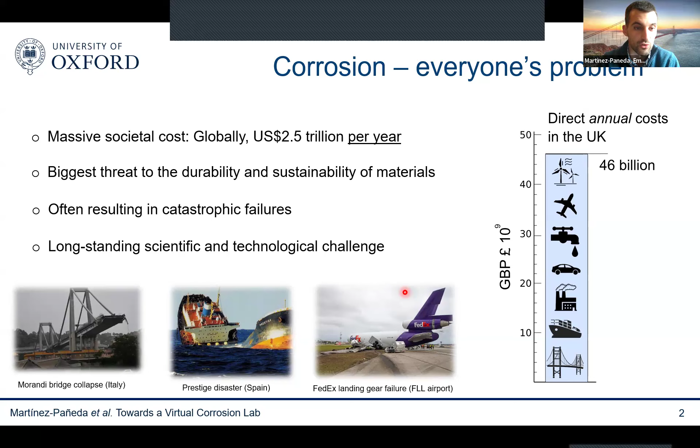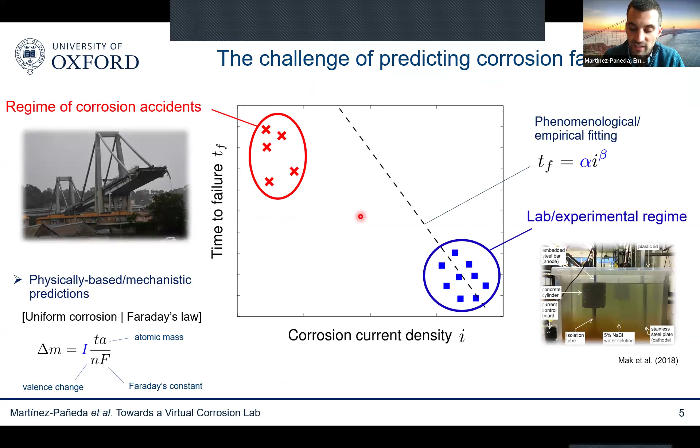So this is one of the elements of the picture, but there's 2 elements basically that give us an opportunity for us computational mechanicians to develop models that are finally capable of predicting corrosion. So the first takeaway I want to say is that predicting corrosion failures requires explicitly resolving the underlying physical processes. That is the problem.

If we want to go from here to here, we need to embed the physics into our model. We cannot make any assumptions. We need to remove all these kinds of fitting parameters. We need to minimize assumptions. We need to just deliver predictions like these that rely purely on physical parameters that have a clear physical meaning and that we can independently measure in a lab. So I believe there's an opportunity now to achieve this.

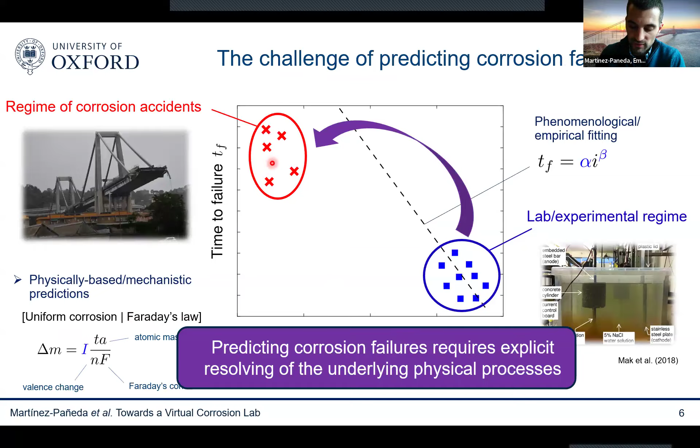And this opportunity has been made possible for 2 reasons. The first one is that we finally have very powerful computational multiphysics tools. Because, as I said, why don't we have computer models for corrosion? Well, one reason is that we do experiments in a very different regime than in practice. But the other aspect is that this is a very complicated coupled electrochemomechanical problem.

You can see here a standard sketch showing a standard stress corrosion cracking problem where you have basically a metal that is subjected to mechanical straining. That metal has a defect, could be a crack, a pit. That metal is exposed to an aqueous electrolyte, imagine seawater. In that aqueous electrolyte, you have multiple ionic species that are moving around due to fluid flow, due to electromigration, due to diffusion.

Then at the interface between the metal and the seawater, you have multiple chemical reactions happening. You have, for example, corrosion, so you have metal atoms detaching. You also have other chemical reactions that induce the absorption of dangerous species such as hydrogen. Then those hydrogen atoms will travel inside of the metal. It will attract to areas of high hydrostatic stress. They will lead to damage, and then you'll get fracture of the component, and so on and so forth.

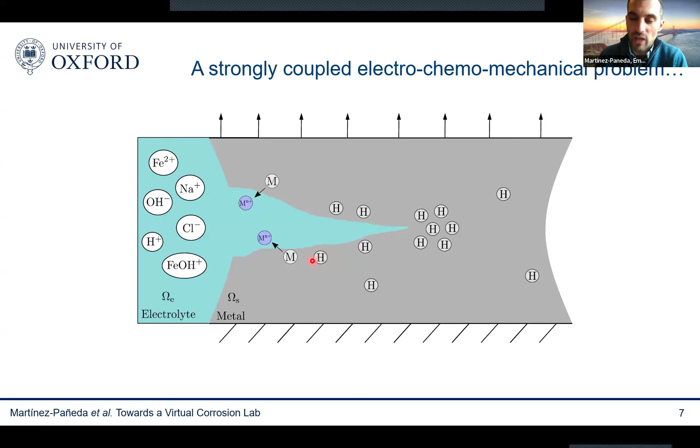So there's many things happening here, many electrochemomechanical phenomena. All of them are important, and all of them are strongly coupled. So if you really want to capture the physics of the problem, the mesoscale physics of the problem, you need to capture all this phenomena. And the good news is that we know what are the PDEs that describe each of these physical phenomena.

So there's no calibration with experiments. Before I run a simulation for a given material, I know what those numbers must be.

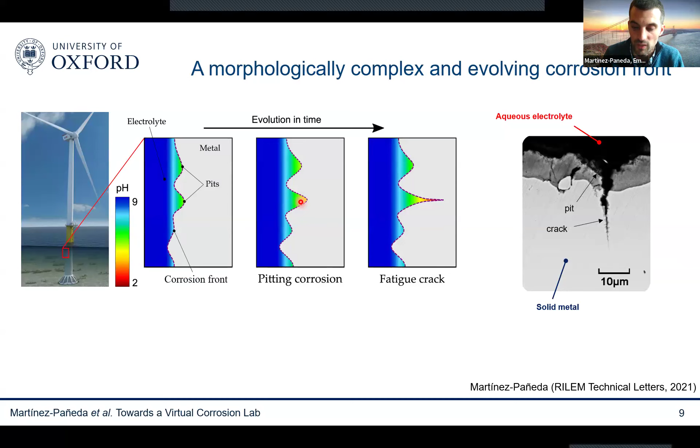So I need to be able to do all of this while this interface is evolving. And this is, I think, one of the main reasons why this has been a big obstacle for us computational mechanicians. People have tried with level sets and other techniques, and we have been able to get somewhere, but not as far as we needed. Let me show you a little bit of the complexity of the problem.

So my whole presentation is going to be a bit high level, but I'll say a few mathematical details as well. And of course, feel free to ask me after my talk.

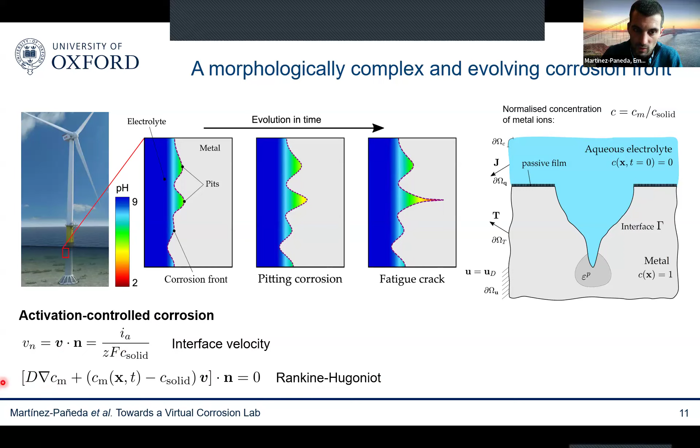But if I have diffusion control corrosion, if I saturate the number of ions at the interface and we need to wait for those ions to move away within the electrolyte, then the velocity of the pit is given by substituting the saturated concentration, the Rankine-Hugoniot condition, and the concentration of metal ions at the interface is given by the Dirichlet boundary condition.

What I want to say here is that this is a very complicated mathematical and computational problem, because we have an evolving interface that we need to keep track of, with a complex morphology, and changing boundary conditions—Dirichlet, Robin—that change in time and space. This is a really complicated nightmare. I'm used to dealing with other interfacial problems such as fracture mechanics, but nothing surpasses this. This is really a computational nightmare.

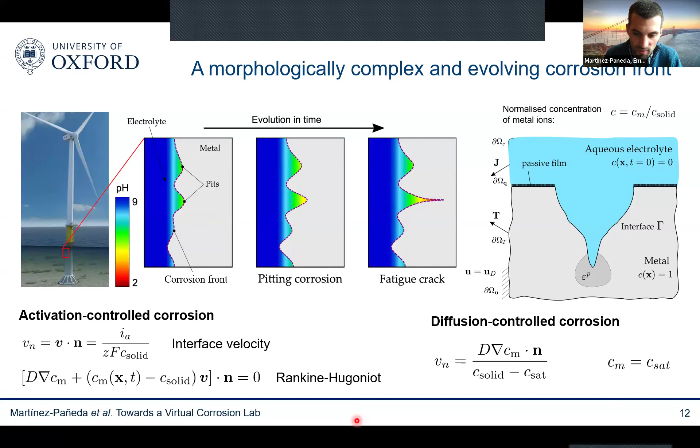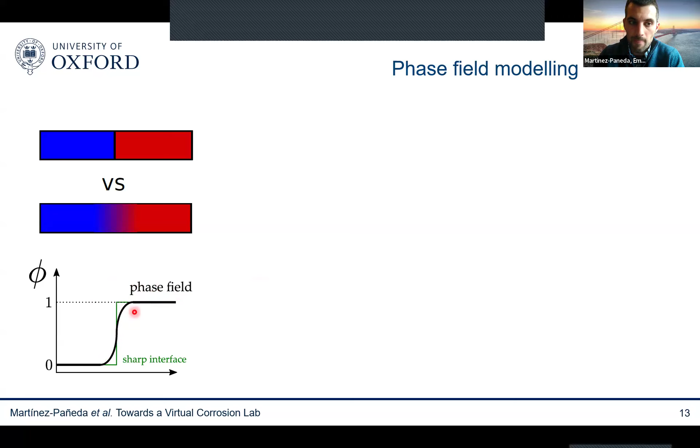And I think this is where phase field models give us an opportunity to tackle this. Phase field models are very compelling when dealing with interfaces. Hopefully most of you have heard about them before, but if not, the idea is quite simple. Whenever you have an interface, you can describe it between two phases as sharp and discontinuous, or as phase field methods do, you can smear that interface over a finite domain and use an auxiliary variable, the phase field, to describe where your interface lies.

This implicit representation of interfaces has many computational advantages, because then you just need to define a differential equation for the evolution of the phase field. And in essence, you can capture any interfacial computational problem, no matter how complex.

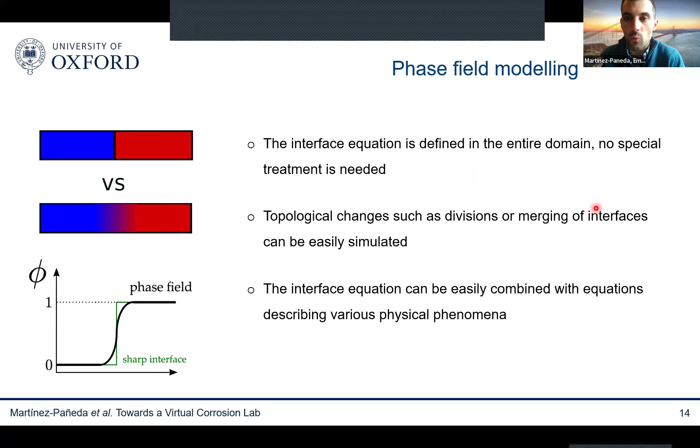Some advantages that come as a result of this: you define the interfacial equation in the entire domain, so there's no need for any special treatment, no need for moving boundary conditions, because topological changes such as division or merging of interfaces are naturally captured without any ad hoc criteria. Also important here, you can very easily couple this interface equation with equations describing all the physical phenomena, so it's very well suited for multiphysics problems.

As I said before, phase field has been a revolution in many areas of science and engineering. It is by far the most widely used technique in solidification and microstructural evolution—this is where it all started. It has also become extremely popular in fracture mechanics.

Our point is that the same way phase field has revolutionized these two fields, there's an opportunity for us computational mechanicians to achieve a similar revolution in the area of corrosion. As you will see later, this is an emerging field—it started only a few years ago, but it's growing quite rapidly, and I think this is the time to ride the wave. So basically, what I want to present today is an opportunity. I'll show you that it's very easy to jump into this wave, and that this is a very good moment to tackle this important problem with these techniques.

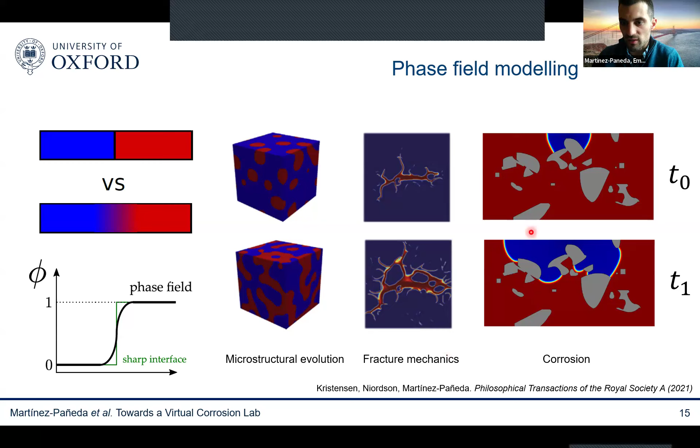So how does it work? Again, I'm not going to get too much into the details. I summarize a little bit the state of the art in this recent review paper.

The idea is that, similar to other interfacial problems, the phase field is going to describe the evolution of the corrosion front, so material dissolution. It's equal to 0 in the aqueous electrolyte, equal to 1 in the metal, and varies smoothly in between. So now we have that concentration and that phase field variable.

This is the simplest corrosion model that I can think of. There are other elements, mechanics plays a role for example, but I'll discuss those later on. I'm not going to get into the details of how you derive this, but if someone is interested, everything is based on a free energy functional, so everything is based on thermodynamics, similar to other phase field models.

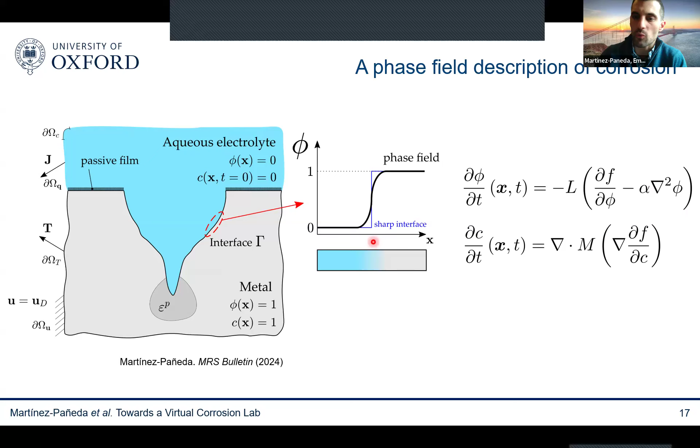It's more similar to those using microstructural evolution than those using fracture mechanics, but again, similar to those phase field fracture models. Basically, in the simplest version, you have a system like this: an Allen-Cahn type of equation, and a Cahn-Hilliard type of equation without the gradient term. So an equation for the evolution of the phase field, and an equation for the evolution of the concentration of metal ions, in the simplest form.

Then you can make some constitutive choices. Most phase field corrosion models are based on the so-called KKS model, so you assume thermodynamic equilibrium between the solid and liquid phases. But basically what I want to say here is that you end up with two equations like this.

An equation for the short-range interactions, the phase field equation, which is basically simulating material dissolution, the detachment of metal atoms. And then another equation for the long-range interaction, which is the transport of metal ions. You can see that these two equations depend mostly on two parameters.

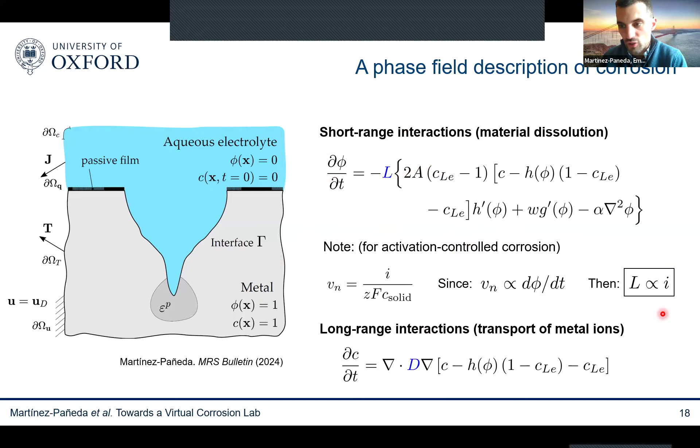So the mobility coefficient L and the diffusion coefficient D, and both have a clear physical meaning. D is a diffusion coefficient we can measure very easily in experiments, and L, this mobility coefficient, for a case of activation-controlled corrosion, is proportional to the corrosion current density. So you can run a very simple experiment in 1D under activation-controlled corrosion, and then correlate that mobility coefficient with your corrosion current density.

Let me show you how this works. I'm going to start with a very simple example, the simplest I can think of. This is a classic benchmark in the corrosion community, called the pencil electrode test, and it's very simple because you effectively have 1D corrosion. You have a metallic bar that is corroding basically in one direction, so it's effectively 1D.

You can see how it works here. On the left, you're seeing the evolution of the phase field, the evolution of the corrosion front, how the metallic bar is corroding. On the right, you see the concentration of metal ions, all the way from the saturation concentration to 0 far away in the electrolyte.

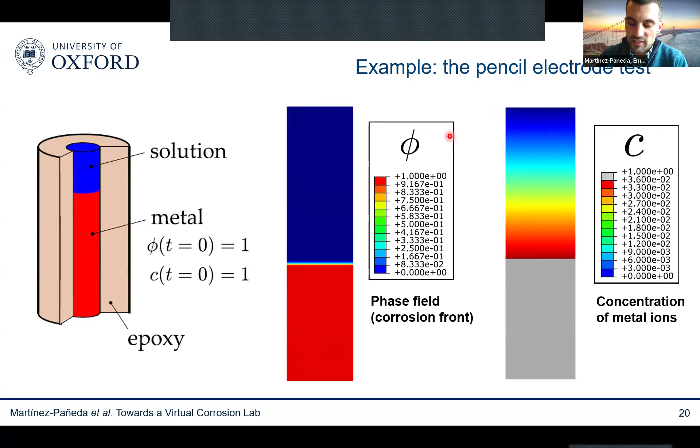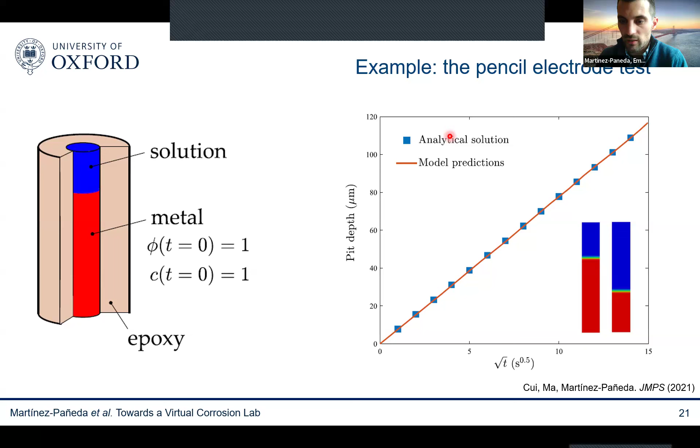Because this is a simple 1D problem, we have an analytical solution for the case of diffusion-controlled corrosion, so we can compare the outputs of the model with that analytical solution, and as you can see, it agrees very well. We have also compared with experiments, and it agrees quite well.

One aspect I want to emphasize is that these models can capture naturally and very nicely the transition from activation-controlled corrosion versus diffusion-controlled corrosion that I discussed before. You can see this here: as I ramp up this mobility coefficient, increasing my corrosion current density, I go from the linear behavior of activation control corrosion to the parabolic behavior of diffusion control corrosion.

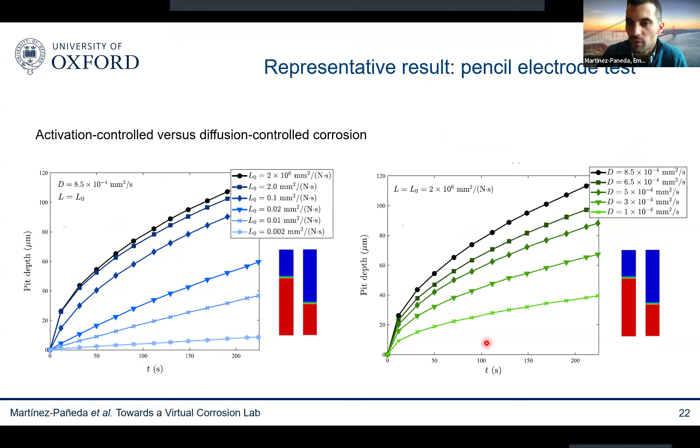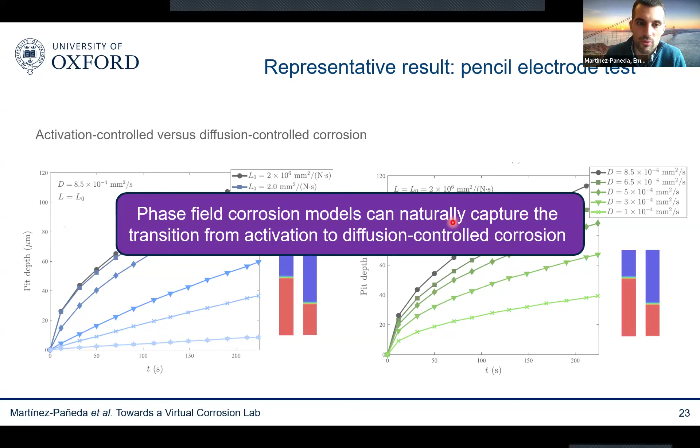This means that when I'm in the regime where the corrosion current density is high enough, my predictions are going to be quite sensitive to the diffusion coefficient. So this is another takeaway: even though I mentioned before we have very complicated boundary conditions changing in time and space, we don't need to worry about those. These phase field corrosion models can naturally capture the transition from activation to diffusion control corrosion.

But of course, I don't want to focus on 1D problems. Most corrosion failures are not 1D.

We don't need advanced computational methods for handling 1D corrosion. What I want is to capture the complexity of corrosion. Corrosion can be a very rich and complex problem, but these techniques are quite robust and sophisticated, and as you can see here, it allows us to capture all the complexity that comes into this model.

We can capture, for example, the role of secondary phases, how the corrosion front evolves to those insoluble secondary phases. I can capture the role of pit interaction without any arbitrary or ad hoc criteria. I can also capture intergranular corrosion.

And of course, these simulations can be done in 2D and 3D. In fact, we have recently compared our predictions with some new XCT synchrotron observations, and this has allowed us to rationalize some interesting observations that were made with those synchrotron measurements.

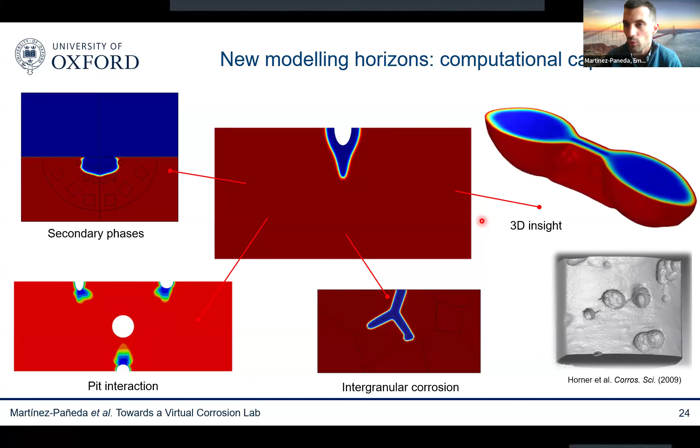So this is a powerful tool not only to complement experiments, but also to replace experiments. No matter what is the complexity of the model, 2D, 3D, interaction of multiple pits, very complex corrosion front morphologies, the tool can handle it.

But what's most important is that not only can we produce beautiful colors, but we can also do that incorporating the physics of the problem. We can again resolve by brute force all the physical ingredients that come into place.

And when you talk to corrosion scientists, they tell you, Emilio, corrosion is too complicated a problem to be simulated with computers. There's many factors playing a role. All of them are interconnected. It's simply too complicated. And they are right to a certain extent.

Corrosion is a very complicated and rich problem, but all that complexity can be incorporated into this framework. At the end of the day, these are continuum level finite element models.

We know how to describe the electrochemistry of electrolytes in continuum level models. We do that in batteries all the time. We can incorporate that into the model.

We know that microstructure and anisotropy also can play a role. We do crystal plasticity all the time in finite elements. We can easily incorporate that as well.

We can incorporate the role of mechanics. We're always solving mechanics problems in our finite element analysis.

We can also combine this with simulations dealing with hydrogen ingress and embrittlement. We have been working for quite a long time on this area, so we can bring this on board. We can also capture corrosion product formation.

So whatever comes to your mind, any problem that you can think of, it can be incorporated into this model, as long as it's a mesoscale problem that can be described in continuum mechanics. So I think there's a great opportunity here and a very rich area to explore.

And we've tried to touch on some of these areas. By all means, this is all very preliminary work, and this is the very beginning. I'm sure there's many things to improve.

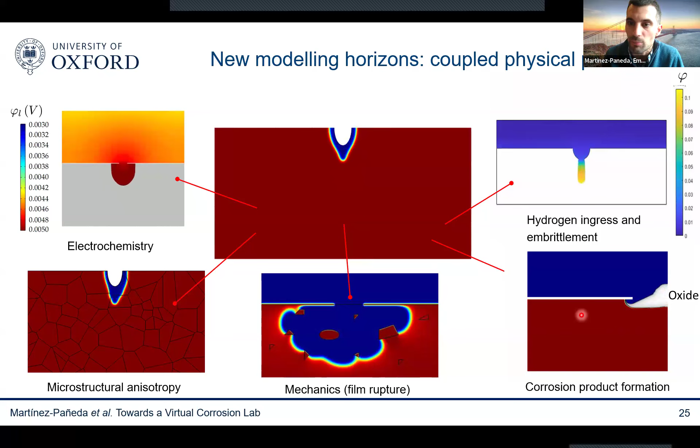But what I want to say is that there's an opportunity now to finally resolve the physics of corrosion and therefore deliver predictions that are mechanistic, that do not rely on fitting parameters or assumptions. So let me tell you how we incorporate some of these ingredients, and I will finish hopefully in time with just some of these examples.

The first thing that I want to say is that, of course, we want to incorporate the role of mechanics. We're mechanicians, so we like mechanics. And mechanics can play a role in corrosion in two ways.

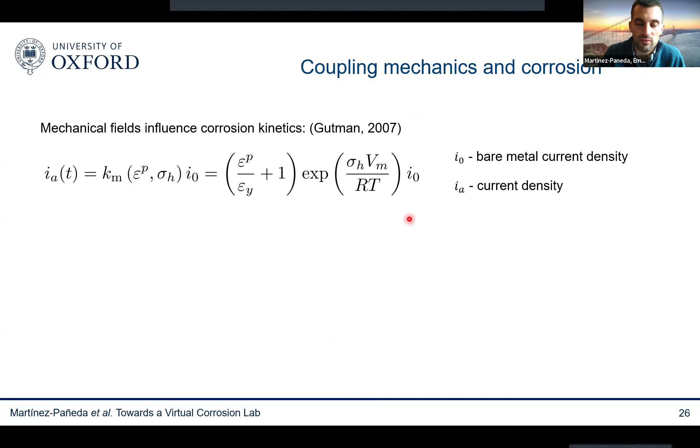Mechanics can influence corrosion by first enhancing the corrosion kinetics. This is, as you can see here, captured by Gutman. So corrosion kinetics, this is the corrosion current density, enhanced by dislocations and hydrostatic stresses.

And because the mobility coefficient is proportional to the corrosion current density, as explained before, we can enrich the description of the mobility coefficient and incorporate this interplay with mechanics. And then we solve a mechanical problem as well, and we're able to predict what happens.

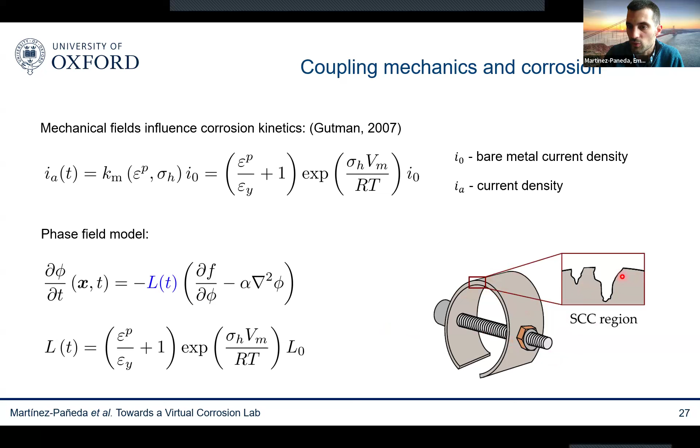We're going to benchmark our predictions with this C-ring experiment, where you can see corrosion behavior as a function of the load. And here you can see the comparison with experiments, and you can see that, without touching anything, there's no fitting involved here. We can capture very nicely the prediction for two different levels of applied load, and not only in terms of the intensity of the corrosion process, but also in terms of the corrosion morphology.

So here you can see these two images on the same scale. There's multiple pits in here.

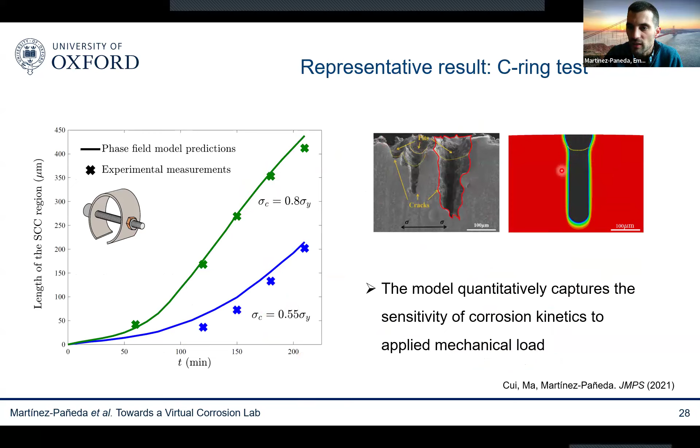We focus on only one pit, but one can model multiple pits, and you can see that the morphology of the main pit is quite similar.

The other way in which corrosion interferes with mechanics is this so-called film rupture dissolution repassivation mechanism. So what do we do when we have corrosion problems? We use corrosion-resistant materials such as stainless steel. What will happen is that you generate a layer that protects you from corrosion, but this passivation layer is ruptured due to mechanical straining, and then you enable localized corrosion, pitting, and stress corrosion cracking. And this is, of course, a challenge.

How do we predict when the layer is going to rupture and we're going to have this localized corrosion phenomena? We know what happens quite well. As you passivate a layer into the metal, you are lowering your corrosion current density. But then eventually, when your strains are large enough, you rupture the layer, enhancing corrosion kinetics, and then after some time you start regenerating and repassivating the layer again. So basically it's a cyclic process, a competition between repassivation kinetics and mechanical straining kinetics.

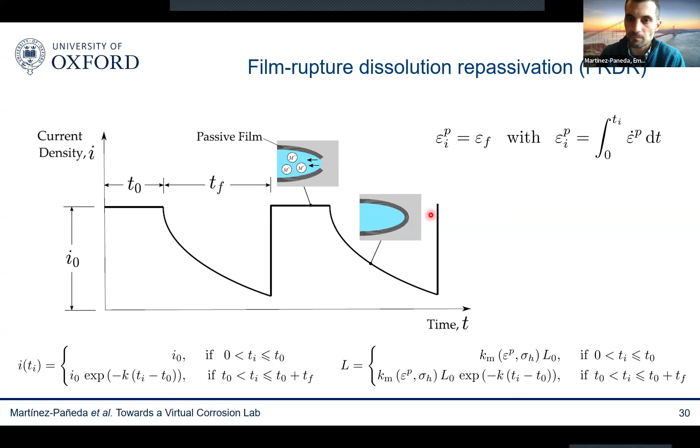We can very easily incorporate this model into our framework because we can enrich the mobility coefficient again, making it a function of the corrosion current density and also the mechanical fields. We're solving a mechanical problem, so we know when we reach the critical failure strain of the passivation layer. Once you do that, you can resolve this interplay between corrosion kinetics, dissolution kinetics, repassivation kinetics, and straining kinetics.

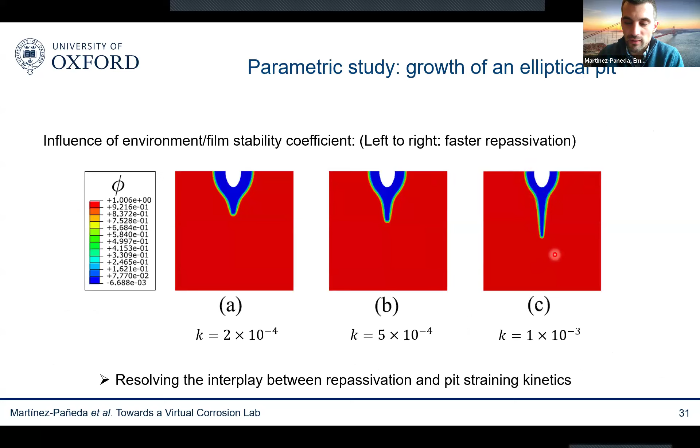You can see that we can reproduce typical results expected from the experimental literature, and we can capture naturally this pit-to-crack transition that the community has been trying to capture over decades.

Another important effect is the susceptibility to microstructure. We know that corrosion rates are sensitive to crystallographic anisotropy, so we can enrich the definition again of this mobility coefficient. We can solve an electrochemomechanical problem with Butler-Volmer kinetics, and we can define a grain orientation dependent corrosion potential.

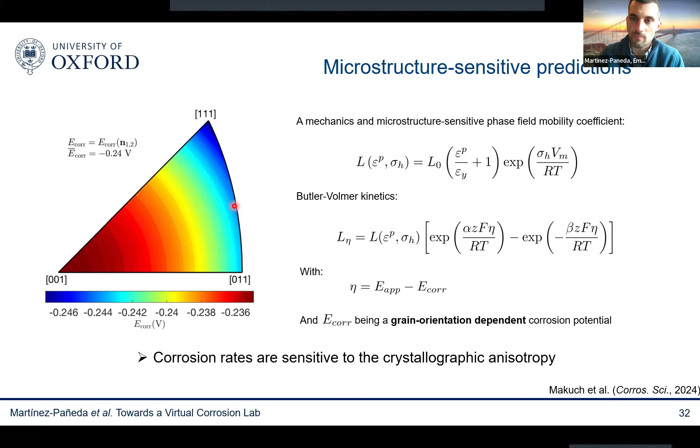And when we do that, many possibilities open here. Of course, you can combine this, for example, with EBSD images that you take from your lab, with all your favorite crystal plasticity model, and you can learn a lot about what role microstructure plays, because we're interested not only in the mechanical anisotropy, but also in the corrosion anisotropy.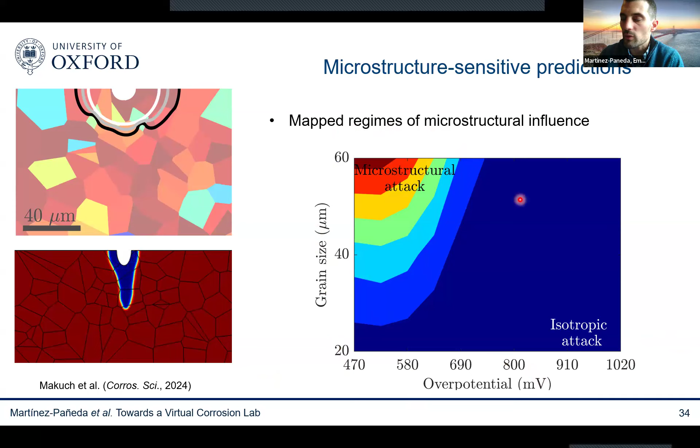We have ourselves tried to focus on these three aspects here. First, we wanted to map regimes of microstructural influence. So we can run simulations with different combinations of RBEs and grain sizes, and we can build maps like this, where we have some measure of overpotential of the environment and grain size, and we can map over which regimes we can handle well with an isotropic model, and over which regimes we need to resolve the microstructure of the problem.

We've also learned that corrosion potential anisotropy dominates over mechanical anisotropy and grain size effects, and we can also use this to understand why 3D printed materials are more susceptible to corrosion due to the influence that microstructure plays in this corrosion process.

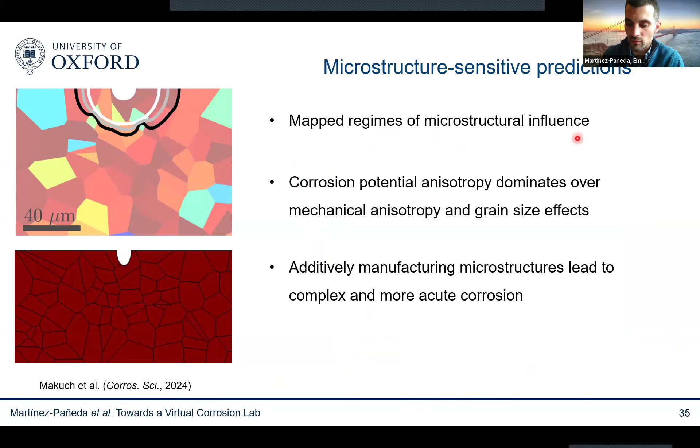The other aspect is the electrochemistry, of course. Corrosion scientists will argue that this is too complicated a problem because so many things happen from an electrochemical point of view. Different to batteries, this is a bit more complicated problem because you need to solve for many ionic species. But again, we have computers now that can handle this problem. Here we have 10, 12, 15 degrees of freedom per node, but again we can handle those problems now.

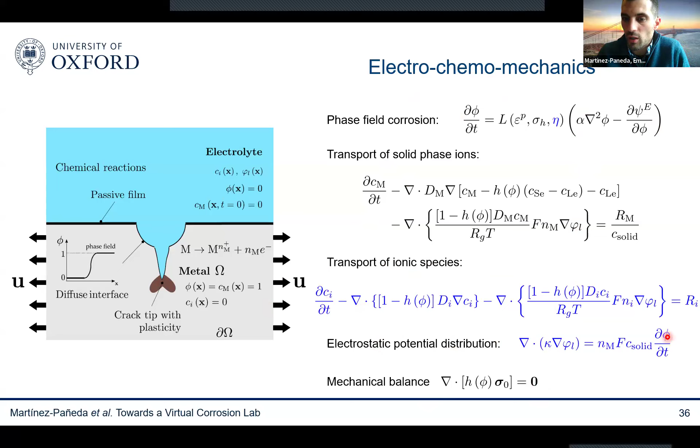So we can add the electrochemical behavior of the electrolyte and the Nernst-Planck equations. We can solve for the electrostatic potential distribution, solve this for any relevant ionic species, solve the chemical reactions, and then we can capture the role of the environment.

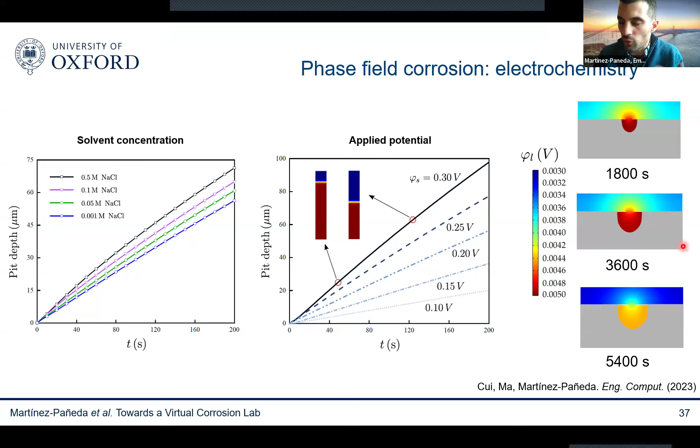So we can see, as we expect from experiments, how changing the solvent concentration is going to change the pit depth. We can see the sensitivity to the applied potential, and we can see basically how the electrochemistry of the electrolyte is evolving as your corrosion pit or corrosion front is evolving. You can capture that naturally, without needing to make any assumptions on how much it changes and so on. You can see, depending on the pit geometry and the fluid flow and all the elements taking a role, how these things naturally evolve.

One thing I want to emphasize is that when solving all of these surface reactions, these are very nonlinear problems, and we often have convergence issues. A typical commercial finite element package for this kind of multiphysics problem is COMSOL. It has implemented most of this electrochemistry, and it already has some phase field fracture models, making it easy to incorporate phase field corrosion. But we saw that we're very limited when simulating these corrosion reactions because they're very nonlinear and quite difficult to solve. So we decided to tackle this problem with our own in-house codes.

We decided to use lumped integration as opposed to Gauss integration, and we were able to bring very significant reductions in computational time. As an example, we looked at a case study predicting how much hydrogen enters the metal due to those reactions. With COMSOL, after a week on our supercomputer, we could only predict what happens after 10 minutes of exposure to this corrosive environment. When we implemented lumped integration in our in-house C++ and MATLAB codes, we were able to calculate, over the same computation time, what happens over 50 years. So we went from 10 minutes to 50 years, and 50 years is the engineering time scale that we're after.

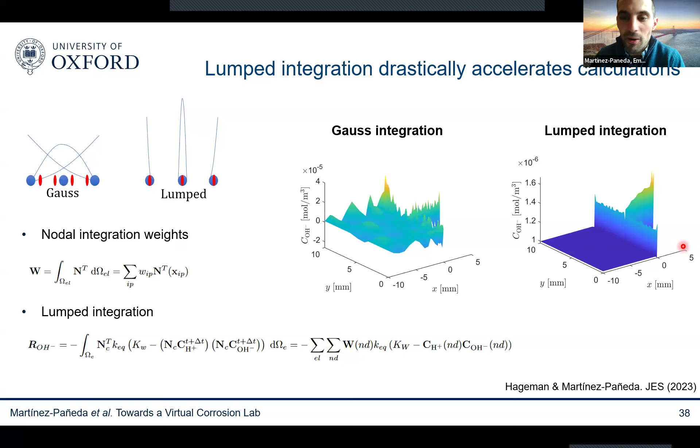What I want to emphasize is that there are many opportunities for people like us. A lot of people from the corrosion science community who do not have a computational mechanics background are jumping into this problem and this opportunity, using commercial finite element packages like COMSOL. But I think there's an opportunity for people like us to make a difference, because we can go much beyond what commercial packages allow in these cases. We know a lot of tricks from our standard, conventional computational mechanics problems that we can bring into this discipline.

Another application I really like is what I call biocorrosion: the degradation of biodegradable materials in body fluid. The motivation comes from the fact that whenever we have an implant in our body, we normally use titanium or materials that do not degrade. That's a problem, particularly for kids, because then you need a second surgery to remove the implant. The ideal material is a biodegradable one, such as magnesium, that retains stiffness throughout tissue or bone healing but then eventually degrades. Magnesium is perfect for this, except for one thing: it degrades too fast.

There's a lot of experimental work going on trying to develop magnesium-based solutions for this, where you might change the geometry of the implant, change the corrosion kinetics, alloy magnesium with other materials, or create a composite containing magnesium and other biodegradable materials to slow down this process. But this is a very slow process requiring a lot of trial and error. So our goal is to develop phase field models for corrosion applicable to this degradation in body fluid, to accelerate the discovery process for this new generation of magnesium alloys.

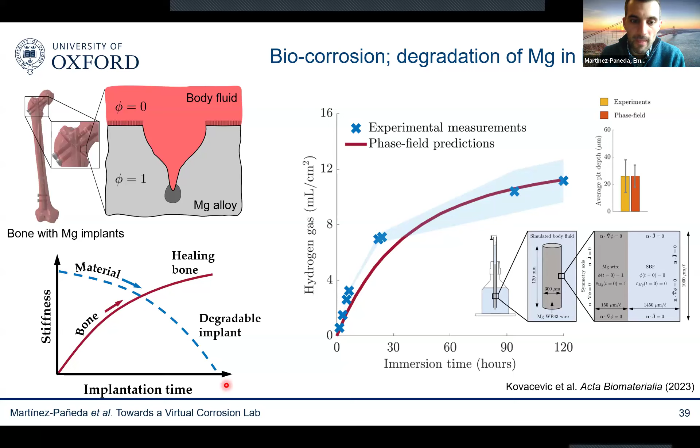Two aspects I want to emphasize: first, we're not limited to simulating small samples. We can handle 3D simulations of stents and full implants. The other aspect is that one problem with experiments is that you cannot do them on humans, so you need to somehow simulate that body fluid. With these models, we can do virtual experiments under in vitro conditions. We can show that the model agrees well with lab experiments, and then change the electrochemistry of the electrolyte to reproduce human body fluid, going from in vitro conditions to in vivo conditions.

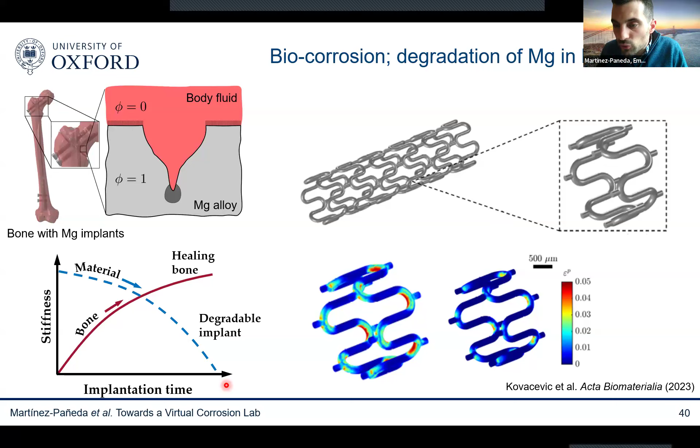Moving on, so far I've focused on cases where you're applying a current or an applied potential, which is what commercial finite element packages like COMSOL allow you to do. But with our own tools as computational mechanicians, we're not limited by that constraint. We can simulate what happens not only in lab conditions, but also what happens in what we call natural corrosion.

So in lab conditions, we enforce an applied potential or current, but in natural conditions, you have charge conservation—your metal is degrading without any applied potential. So you can add the metal potential as a degree of freedom and enforce charge conservation. This is a code we develop in MATLAB, and we also have it in C++.

We use this, for example, to understand what happens with reinforced concrete structures—under which conditions, how much water you need to sustain the corrosion process, and other interesting problems. You can see more details in the paper. We've also used this to tackle the problem I showed at the beginning, going from accelerated corrosion current tests in the lab to predicting what happens over decades.

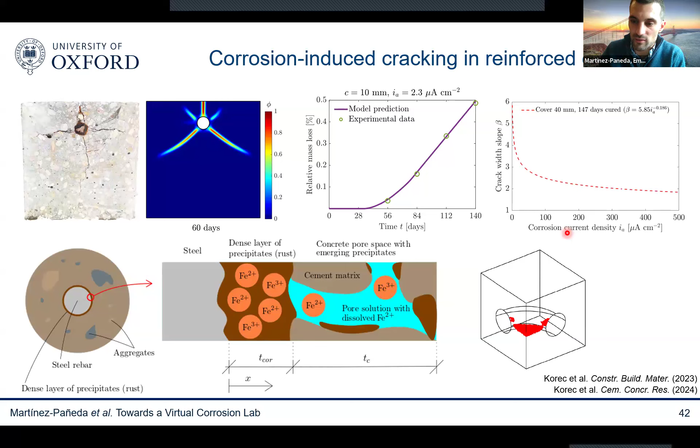Because we can capture the kinetics and physics of the problem, we can show it's very different from the linear interpolation I showed before. We can capture the rate limiting phenomena and the transitions from one mechanism to another, going from fast impressed corrosion current tests in the lab to predictions over realistic time scales. This is work mostly done by my student, Eugen Korec.

We can also incorporate the role of the electric double layer. I'm not going to get into details for the sake of time, but there's some literature there to show.

I'm going to finish with what I think is a very interesting example: a generalized model for stress corrosion cracking. This is a very complicated problem, because you have not only anodic dissolution and material detachment, but also fracture originating from mechanical rupture, typically accelerated by the ingress of species such as hydrogen.

So it's a complicated problem, and you'd typically need to assume what the dominant mechanism is before modeling. But the good thing about these models, with computers being big enough, is that we don't need to make any assumptions—we can simulate everything. We can become greedy, add all the ingredients, and let the model decide for us.

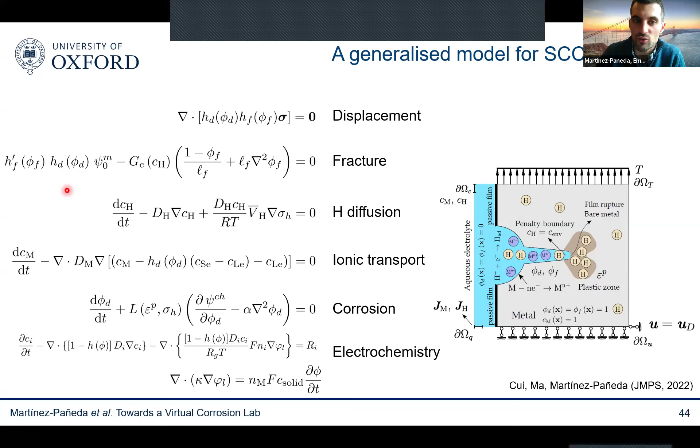So here we are combining everything I showed before: the mechanical problem, ionic transport, electrochemistry, and corrosion, along with the fracture problem. We have a phase field model for fracture, and also the hydrogen uptake and transport problem. So we're solving everything together.

When you do that, you can naturally capture the impact of the environment—whether it's anodic dissolution or hydrogen-driven mechanisms, and how one combines with the other. There are a few items one has to take into consideration.

The first thing is you need to capture well what the crack opening is. There's ongoing discussion in the phase field fracture literature about various approaches to appropriately capture the crack opening. This is something people working in hydraulic fracture are very interested in, but it's also relevant here. We need to understand the electrochemical behavior inside cracks, and we propose a solution you can check in our recent CMAME paper.

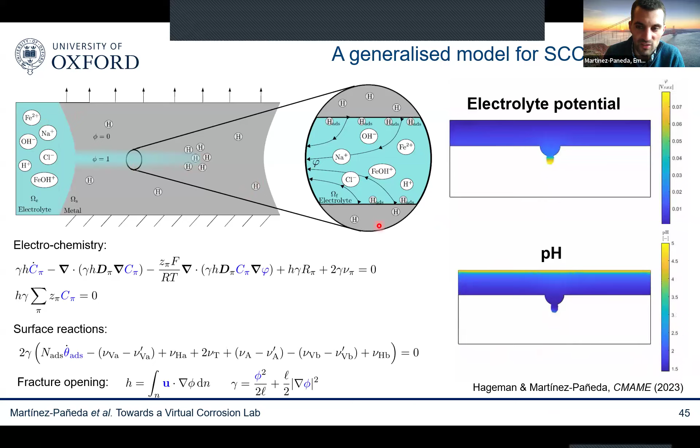We also used this model to understand the classic experiments by Gruhl, done in the 80s, where he tried to understand whether aluminum alloys fail due to corrosion or hydrogen embrittlement. He exposed cylindrical samples to a corrosive medium and protected the outer surface: if failure initiates from the inside, it's due to corrosion; if near the notch, it's due to hydrogen traveling toward the stress concentration area. We found that our model predicts his experiments quite nicely.

I think his experiments fail after 11 hours, and our simulations fail after 11 hours and 20 minutes, if I remember well. And then we can also change the conditions, change applied current density, and see what he would have predicted if we had considered all the different conditions. That's all. I'll just finish hopefully on time with a few questions.

Again, the points that I want to emphasize here, and the reason why I wanted to present this work is that I think there's an opportunity for us as a community. I think that corrosion is a long-standing problem for scientists and engineers. There's a lot of money involved in corrosion, and there's a lot of people interested in solving this problem, in predicting corrosion failures. And we are not able to predict corrosion failures. Again, they happen every day, everywhere in the world, despite years of experience.

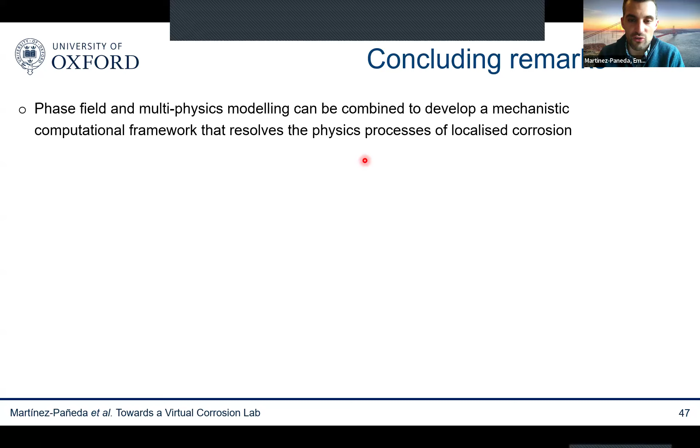recent development that allows us to explore this opportunity is phase field modeling. There's many ways of dealing with evolving interfaces. Evolving interfaces are both, I guess, a challenge and an opportunity for computational mechanicians. But I think that, in my opinion, phase field has been really a life changer. And I think that in the same way that phase field has revolutionized fracture and solidification, it is going to be a revolution in corrosion science.

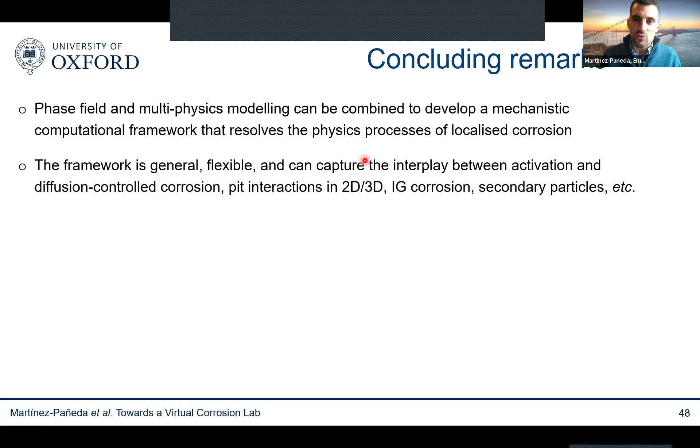The good thing, again, is that the framework is very general, it's flexible. You can incorporate it easily into your favorite finite element code. You can capture naturally the alternation between diffusion and activation control corrosion. You can capture problems of arbitrary complexity, pit interactions in 2D, 3D, intergranular corrosion, secondary particles. You can combine this with EBSD measurements, with crystal plasticity. So it's very straightforward to incorporate it into what you already have. So I think this is one of the key advantages of this method.

And then, well, we try to contribute to this community, or we try to champion this approach by incorporating some aspects that we thought were relevant. I'm listing here some of them, but every time I talk to corrosion scientists, they come up with another 50 or 100 interesting phenomena that they want to incorporate into these types of models. And again, many opportunities for us as computational mechanicians to bring all the interesting acceleration schemes that we have developed through other applications into this problem, and bring all our computational insight into developing tools that not only can bring fundamental insight, but can also handle the complexity and the scales associated with engineering practice.

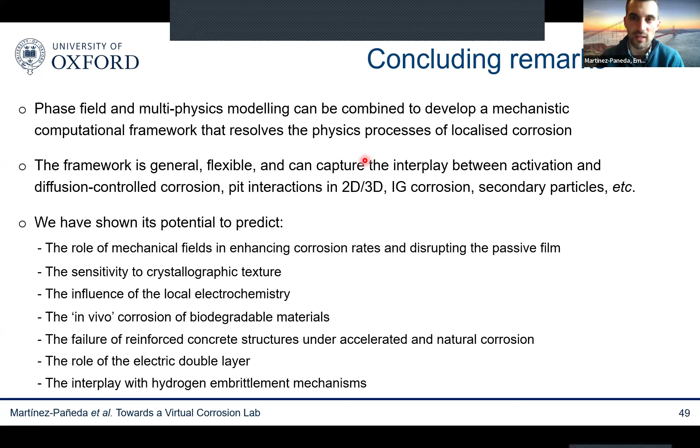That's all. I would just finish by saying that we release all the codes that we develop. So everything that I've shown you in this presentation today, you can reproduce at home. You can download the codes from our website. We work with a variety of techniques. So we have our own in-house codes in C++ and MATLAB that we also share. We also do a bit of work on Julia and FEniCS. But we also use commercial finite element packages like Abaqus or COMSOL, so we provide all of those up there. So up to you, whatever you use, and if you have any problems, of course, feel free to reach out. Thank you very much for your patience, and hopefully I haven't run out of time.